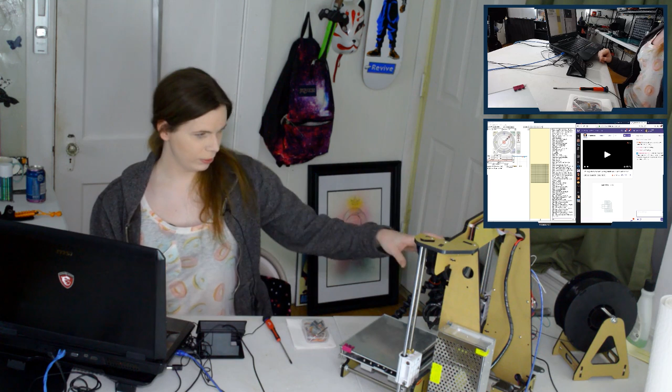Okay, so today we're going to be doing... oh my god, actually let me re-sign in with my other account. I don't want to be... I need to be able to actually mod this channel.

Does everything look okay? Sound okay? All that stupid crap? I'm all sweaty now. I was completely comfortable and now I'm sweating. It's great, I love feeling good.

Oh, like all my cool friends are here. Yay. One second though, I've got to... don't know what's left of the screen over here? You don't need to know what's over here. It's all over here.

Congratulations, Zachary, write this down in your calendar, you're never going to forget this. No, on the screen. On the screen? You mean on this thing? I don't know what you mean.

Windows. What's left? I don't know, it's not a big deal, like you're not really supposed to see that. Yeah, the window next to the Twitch window, I'll make it bigger later, especially after I sign in with a different account, get off this one.

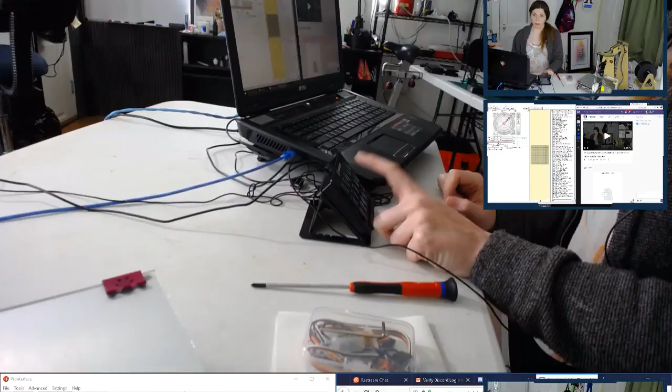So, I'm going to check all the different views out real quick. We got the screen cap view, that's actually sending over the Ethernet, so I'm not using a capture card for that, which is nice. We got the big web camera, we got my giant hands, here's the Elgato Stream Deck, and here's my giant hands. Hate it, just cut the cord. I'm not actually going to cut it because I'm poor.

Anyways, so let's go back to the DSLR for a second. There we go. All right, so we're going to be installing this thing, the BLTouch sensor, onto the 3D printer, so I don't have to do this anymore and level it, because it's super annoying.

Got some paper here. Oh yeah, this came from China and they printed this out on a packing slip. Guess they just forgot to pull it out of the printer.

Looking good. It also looks like they need to change their color cartridge. It's really scan-liney on there, can't really tell on camera though.

Streamlabs OBS does a nice job of joining chat rooms. Yeah, it does, but it's a lot of overhead and I like to have control over everything. Also it'd be over there on the other computer, so I wouldn't even be able to see it.

Here I'll go through the basics of how it works, then we're going straight into it. So it's this little finger on here, and it generates magnetic flux whenever it goes in and out, like that. So it goes down, and when it gets touched a little bit, it's like it's magnetized now somehow, and then it snaps up, so it can come down, touch what it's going to, and then still stay above the nozzle afterwards.

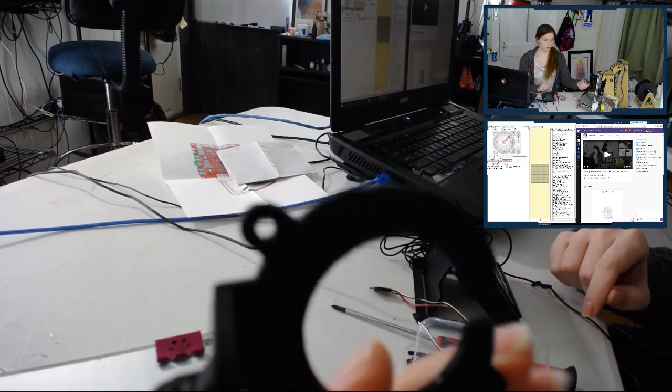All right, so this is the mount that'll let us mount it on the dealie. Where is it? No, that's not the right one. Webcam, there we go. And it's probably not going to focus because of that, you know.

Either way, it goes on here like this, and then that mounts underneath the exhaust fan, or the hot end fan. I forget what the hell it's called.

Is this a butterfly knife? Yeah. Ow. Anyway, so it just goes on there like that.

It's behind the cooling fan, so we're going to go ahead and do the physical part first. Wow, I'm a mess.

Anxiety feels weird now, I don't know how to deal with it. Self-harm is against TOS? I didn't hurt myself, but now I'm really tempted to.

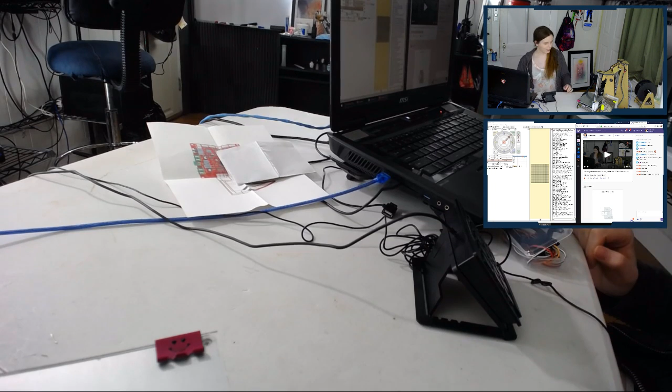Okay, so I might switch over to one of the other views to start installing. Come over here, I'm gonna hug my 3D printer. It's always important to make it feel loved. Oh, you're so cute. Okay.

Alright, ooh, I probably should move the filament over here too, because I snapped the filament off earlier and then I had to manually feed it all back out, and it sucked. I need to get a longer cable for this too.

Oh, by the way, I have an actual Gorilla Pod now. I have to do exercises in order to be able to use it. That doesn't look right.

Okay, oh, it kind of came undone. Must have been all that jerking on it I did.

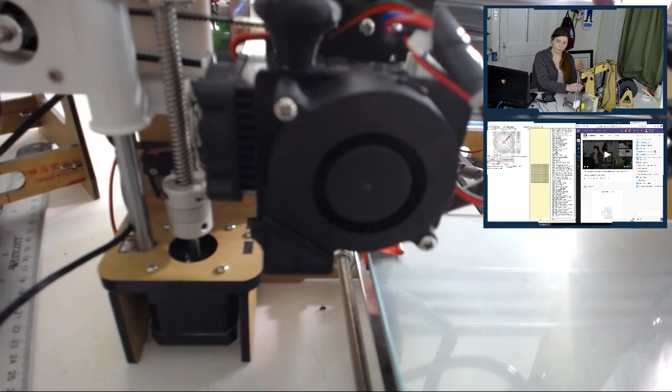New project, image stabilization. Heck you. I'd have to get a gimbal for this thing.

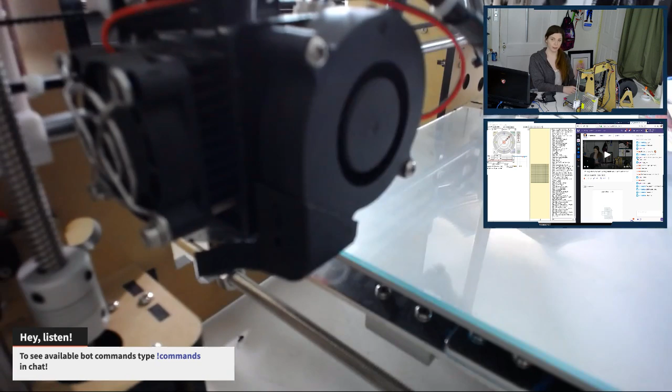Okay, I think that's longer than its focal length. I can move the printer away. Sort of. Come on, center.

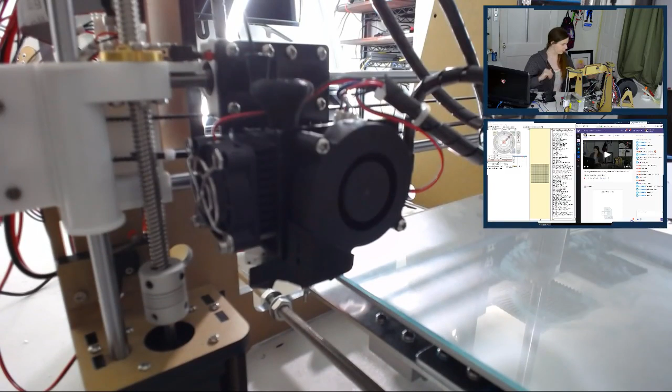Alright, that's good enough. Make sure to always use Milwaukee brand jeweler's drivers, because you don't need your money.

They do. Alright, so this little plate that I've already lost again. It doesn't work. Poop. I think I have to actually open something in the browser to make the bot work.

Anyway, so it goes on there like that, but it has to go back here. So...

Oh, I really wish I could listen to music, but Twitch has made it abundantly clear, and Mixer and YouTube, that you're not allowed to do that. So we're just gonna sit here in silence, unless one of you wants to call me on Discord and sing to me.

Yeah, that's just how it is. Crappy focusing algorithms, we need to get some machine learning. That would actually be pretty useful for focus, because then you could discard based on the training data. That'd be kind of cool.

I have a book on TensorFlow that I've been meaning to go through. Maybe soon.

Alright, so because these screws are too short, we're going to go with these longer M3 screws. It's not going to focus on them, doesn't matter. It's an M3 screw that's a little bit longer. Don't really need a whole dossier of information on it.

Alright, so I think I'm gonna mount this thing on here first. Check out my cool shirt.

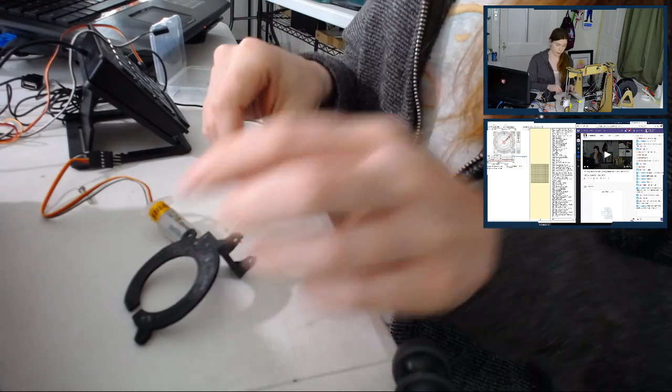I'm glad you're all upset. Please tell me what you think of me, and my face, and my eyes, apparently.

Alright, so I actually had to file this down to make it fit properly. I'll probably put the links when I upload the YouTube video for everything. But I had to file this down a little bit because it was actually touching the bed even when it was retracting. So that was fucking annoying.

There's my first swear. Man.

So sweaty. Why am I so sweaty? I was nice and cool before, and then I pressed stream, and now I'm just like... What's the temperature look like in here? 74 degrees.

It's my favorite scientist. I will stop streaming sometime soon. Please don't, I'm pretty sure I set it to mature audiences only. Wish that meant you could go shirtless. That would be nice, or at least wear a bikini top or something, because it gets hot up here during the summer, and pretty much always.

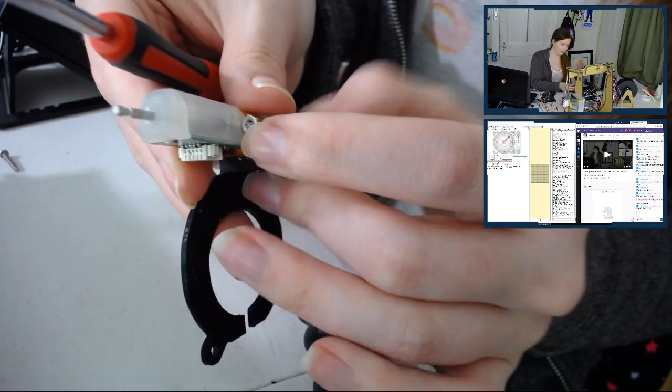It's a lighthouse with a little rabbit in the front. Oh man, I forgot how much of a pain in the butt this was. I'm probably not showing you doing this at all correctly, but these screws butt right up against the edge of the unit, so they're really hard to actually tighten down. If this is actually on the printer at this point, it's super, super awful. So I figured I would just do this now.

You're gonna play Subnautica instead of watching me? No, that's fine, Subnautica's an awesome game.

You would need to blur the robotic dick, but you could explain what you were doing in detail. Let's not rule anything out here. That's true.

Alright, so now we can go back over here. Well, we've already taken the cooling fan off and the fancy printed, I forget what manifold it's called. Kind of looks like an exhaust manifold, doesn't it?

A fanfic writer fan. I guess I didn't follow that. Those things have such a crazy huge following though. I'm always amazed at the people who get into them, and it's always slightly perverted, but it's okay for some reason, which is fine. Everything's slightly perverted. Everything's a lot perverted, you know.

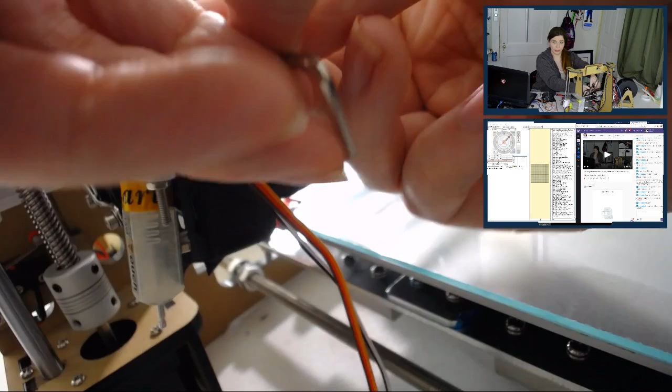Oh my god. I dare you to hold your hair upside down. Sorry, I'm kind of blocking the view. It's been a while since I had to consider camera placement.

I'm just screwing the fan back in anyways, it doesn't matter. None of this matters. But I am going the wrong way. Quick tip for you, anyone who might be new to whatever: you have to go clockwise in order to screw it in. If you go the other way, that unscrews it.

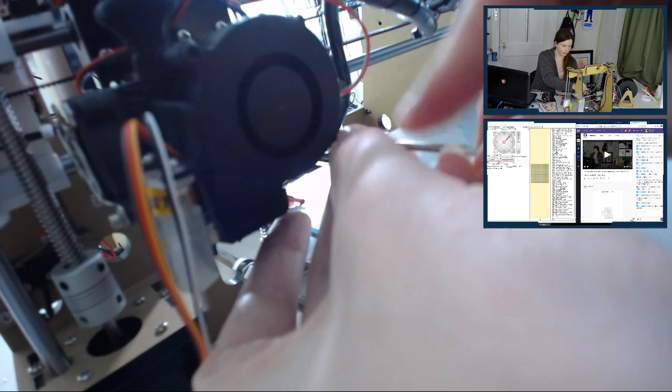Just screwing in screws. Good times.

Yeah, they counterwind the screws or add weird screw heads on, which is still done today. Wasn't it the GameCube game discs that were supposed to be read in reverse compared to standard CD readers at the time, and that's how they kept people from bootlegging? You just reverse the polarity on the drive, on the ESC or whatever on the drive.

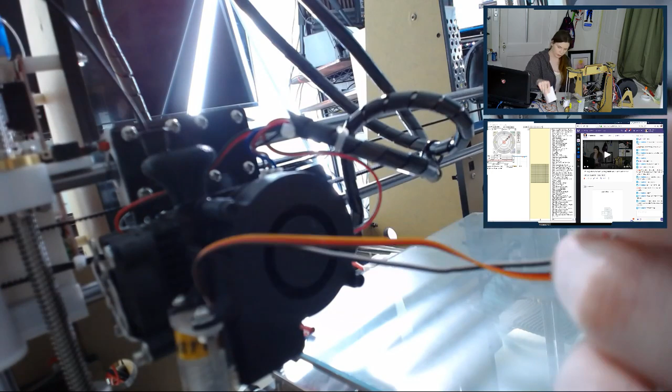Okay, so now we've got this big old connector here, and we've got this piece of paper.

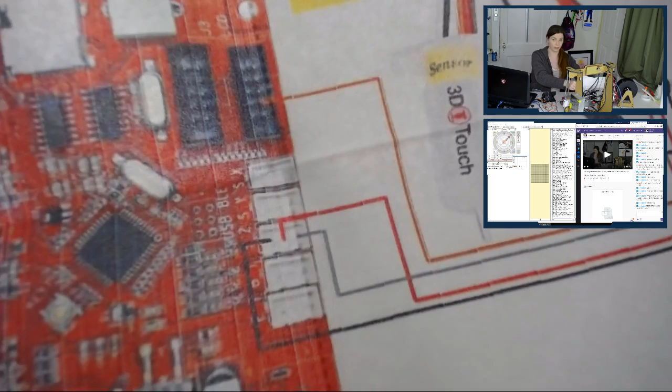Anyways, that's what we're supposed to do. It's actually pretty easy. The most annoying part is that you piggyback off of the LCD up here. You have to piggyback off one of its pins. You can see the connector down there, but obviously there's no easy way to get to it. Last time I was poking around in here, I figured out a real easy way to do this.

Let me see if I can get it in there close enough so you can see what I'm doing. I'm gonna stand up. Alright, so first we have to get the... I'm just gonna sit on my knees. Don't judge me.

I hated Riker. I liked how Riker sat in chairs. That's about it.

Oh yeah, it's like they couldn't buy a new printer cartridge. It's got a bunch of lines and stuff in it. Anyways, so this is all the cabling. Point it at me for a second. This is all the cabling. Oh, I guess there are two separate cables.

Riker had an impressive beard game. Yeah, it was alright.

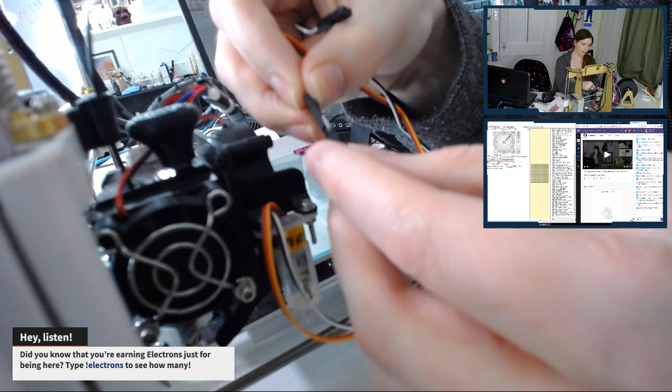Alright, so this end's easy because it just matches the colors together. Let's see if I can move it over a little. Alright, so you just clip these together, I think. Yeah. My giant hands get in the way of everything, but you get the idea.

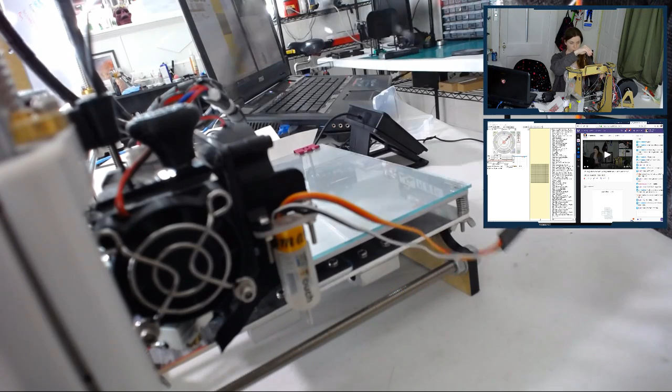Alright, so now we have this jangled up mess over here. We gotta figure out where these go, but first we have to kind of loop them over. Okay, so I gotta feed them over. Let me check the chat.

Riker always looked like he had a joke and he wasn't going to share with anyone, and he felt so smug about that joke. Yeah, that's pretty much it.

Yeah, seems like a beard would be really annoying in the summer, but I don't know. You could always just thin it out or trim it down, I guess.

We'll never know what C. Miami's beard looks like. He hides his face. All he ever shows is his thighs.

Let me catch up on the chat.

His joke was a plug. That was the source of his smirk. Oh yeah, I did get a face shot. I forgot about that. His joke was a butt plug? Is that the joke? Or did I miss something?

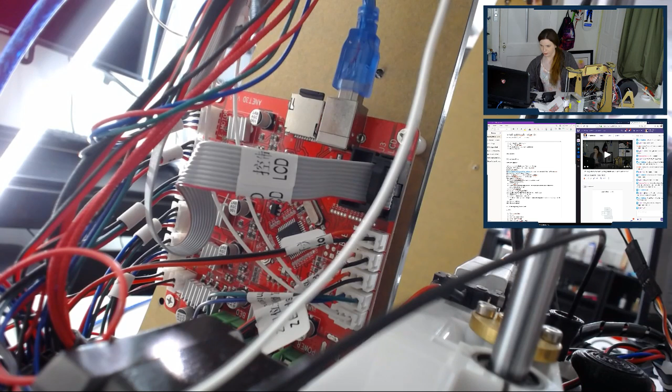Yeah, I don't know what, my old version of it never got toasty, but this one sure does. Must be that Carl Zeiss image lens process. Carl Zeiss.

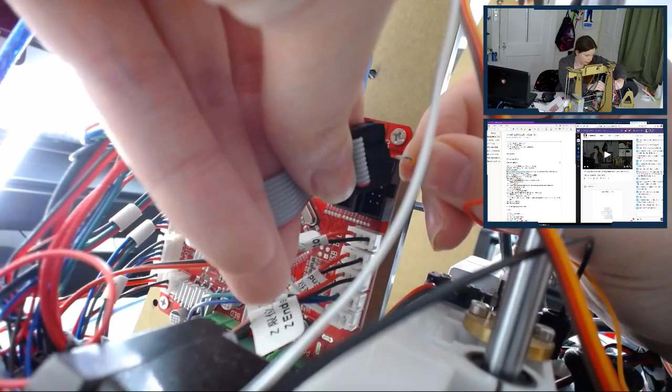Alright, so we basically have to do pin 27. Instead of soldering out a little pin here like a lot of jank masters tend to do — that's a weird word I've never said before — what I'm just going to do, what I did last time, which you guys would probably remember, not, is I'm just going to stick it in this hole, and come on, stick it right in there, twist it to the side, and you're done. It's nice, pressure fit, no problems. And it works.

Alright, now I'm going to check my phone for how I hooked it up last time. Where did I put my phone? Oh, I'll put it over here. One second, I gotta get water.

I don't think you can drink alcohol. I should probably check my Restream chat to see if anyone else is chatting with me. If you're on Mixer or something, my chat client broke so I can't talk to you, which makes me sad. I'll fix it next time.

No alcohol. Beer's just supposed to be considered a food group, but this is America.

Okay, so the white cable goes, well, let's unplug this first. I'm gonna have to get a little fancy here. Alright, so we need to find the Z-end stop, which is nicely marked right here. And we just pop you out. Come out. There we go. Alright, so we got the Z-end stop, and it actually has 3 pins, I think, because it can be a PWM device too, which is lucky for us. And you look over here, and dang nabbit, okay, so that pin goes in there.

And our white pin, what is our white, or cream colored pin or whatever? You can't see because the printout quality is terrible. I could probably guess if I read these. We got ground, we've got... you can't read this, never mind.

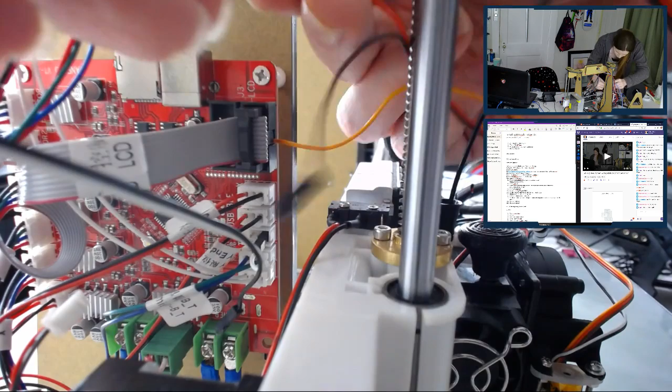Okay, so you got white in there. And we gotta do red, which is gonna probably be our 5 volt, yeah, at least they standardized that part. There probably is a PDF, but I'm not gonna worry too much about it. I know where everything goes. I'll post one with the YouTube video when I chop it up and take all the embarrassing stuff out.

Okay, so we got that. Now there's orange.

Okay, so one of these is supposed to be a ground. They're both ground, and it says to link them together, but I'm going to do this the lazy way, and I'll use a ground on the secondary LCD controller. I don't know if you can see what I'm doing at all. Anyway, so yeah, you can see that.

Alright, so these check out. These are good. We got our power, our control, and our ground. And then we need another ground for, I think, another... I'm not actually sure what the power system for... I think there are two separate power systems for the... well, no, never mind. One's just a weird control signal, I guess. It's probably a PWM or something. What do we got here?

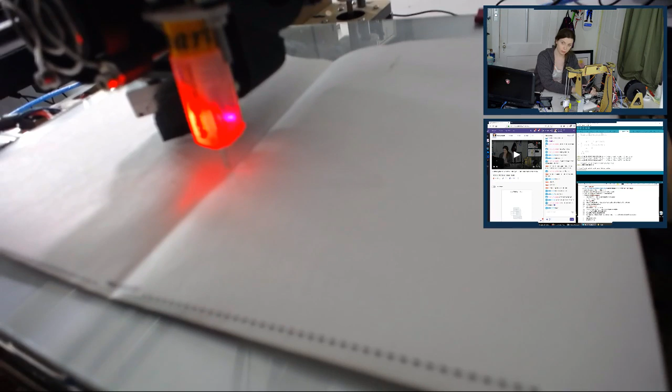Alright, so what we're going to do is lower this puppy down until it's touching just the tips. Alright, now it's compressing the bed a little. We know exactly where these guys touch, and we can mark it out.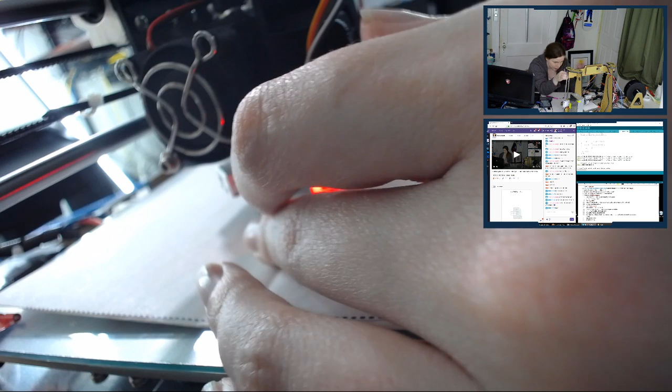I've got a pink pen because I'm a girl. Okay, how am I going to mark that? The pen isn't going to fit under there. I need help, I need help. I think if I look, it might... maybe I can pull the pencil apart. Damn it. Okay, you know what I'm going to do? I'm going to lift it up, mark, and then put it back down. And if it's wrong, I'll do it all over again. Just going to keep my eye on that spot. Actually, it made a little indentation. So I think we're all set.

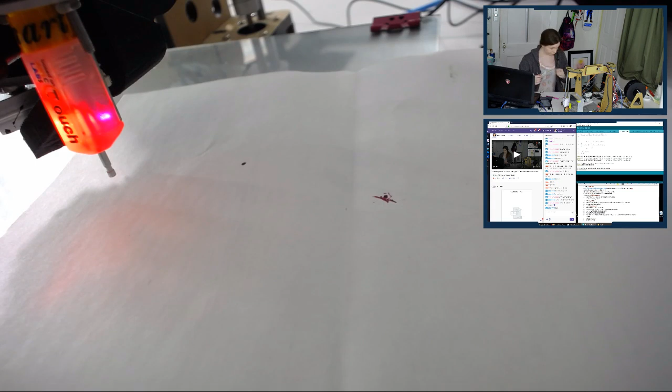Alright. So now we've got the nozzle here, and the probe here.

What am I supposed to do with this? Anyway, let me get a square. Let me get a square. It's Swanson Speed Square. This stream is sponsored by Swanson Speed Square.

So, not a cat. How big is your base so far? And do you have any vehicles yet? I feel like I'm making this really difficult for myself for no reason, in Subnautica. Oh, you have the loader? Awesome, I never got that far. I kept dying trying to get vehicles.

Kryzen, that's why you spend $800 and get a... this isn't gonna work.

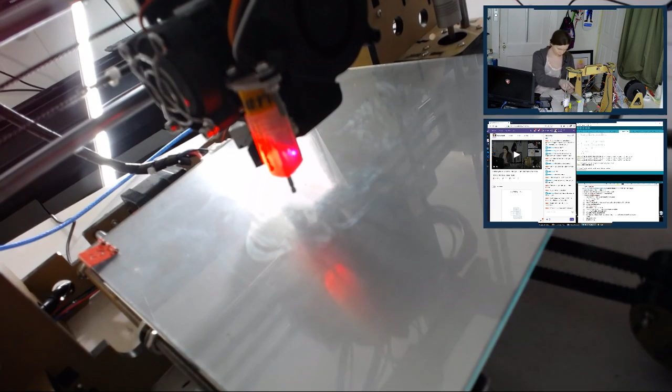Great, the kids are singing downstairs. And that's good.

Okay, so what I like to do for this, because it's a pain in the butt, is we lower it down. I'm gonna try and kind of get this on camera so you can see what the hell I'm doing. Why the hell would I stream it if I don't want you to see what I'm doing?

Come on, over here. Meow. That's probably not gonna work. Stupid ass gorilla pod. More like invertebrate pod.

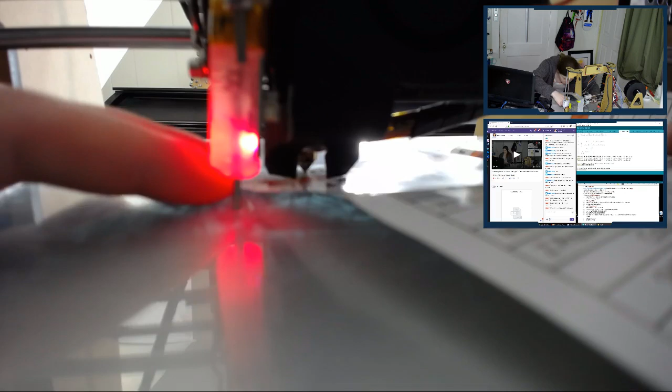Alright, so what we're going to do is lower the nozzle until it's touching. I really think it's extended. Let's see if we can fit a piece of paper under there, or anything really. They're both basically the exact same height, but I think it means extended.

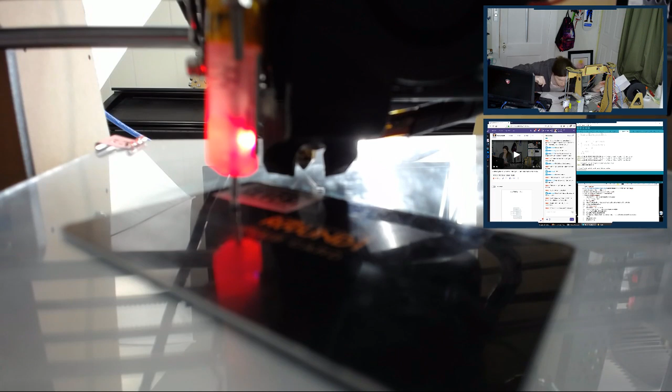I hate this part so much. Okay, so it's touching. And this Round 1 club card, which is a great arcade if you've ever been to it, you can see how many times I've been on the back. It just fits underneath it, and I think this is about 1 mil.

Holes, holes, holes. What? Wrong side. No, it's only one, huh? Okay. Put holes in it? What do you mean, like put a hole in the thing I'm measuring so it can touch and the other thing can't? Because I just do that with basic geometry instead.

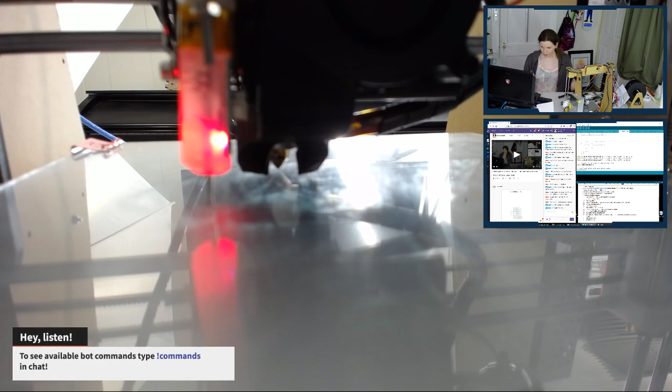Oh, my pink pen exploded. It was my fault, but now I can't find the spring. I need the spring, I need the spring. This is an emergency, so I'm switching back to DSLR view. Help. Where's the spring? Help. I lost it. Fed up with this world. Oh no, donate money for new pen spring and pink 3D printer. Please, I'm a girl.

Alright, if it's one above, right? And above is plus. So 1 millimeter above, and that's going to be Z.

So now we can go back to our screen cap, which is actually working pretty well, by the way. I'm using the NDI interface for that, which is great, super easy to set up compared to an RTMP2. Still sad about my pen.

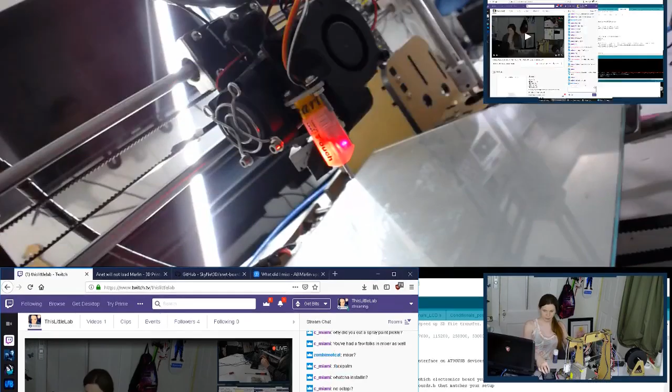I was gonna say it before, it's edible. You still really shouldn't spray it like in your mouth because there's methylated spirits in it or whatever. But once they flash off, you're fine. Not flash off, but once they evap.

With my stomach the way it is, there's no flipping way I would do something like that. Even that kind of irritated my stomach a little bit.

I've had this sitting around for a while. I don't think it has an expiration date on it though. No.

So now all the mystery's gone. Yeah, I didn't figure it could. It's basically stuck in a pressurized chamber, I don't know how stuff could even get to it. Sorry, zombie, not cat. I didn't want to give away the mystery, but then I felt bad, so I did.

It could get in during processing. I don't know how it would survive though. Those cell walls be like...

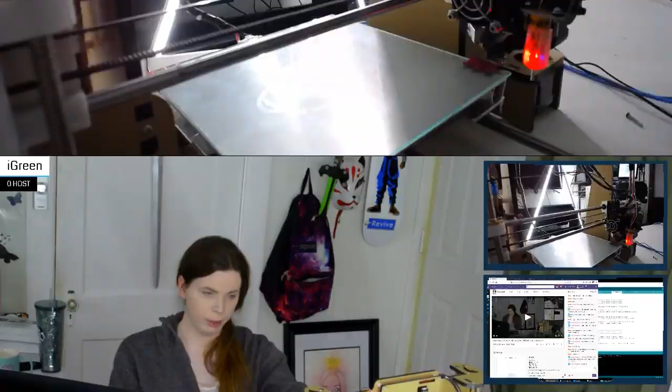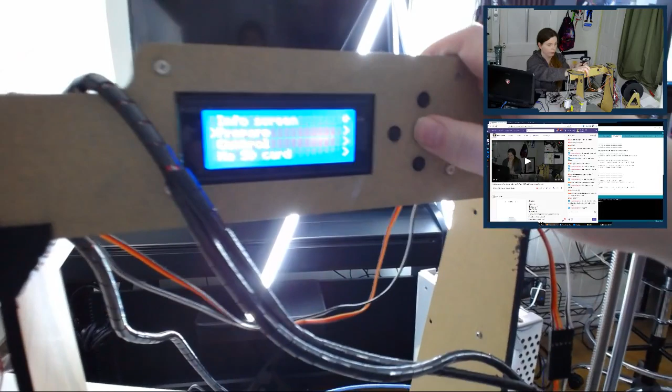Alright, so it says 3D printer ready. I'm gonna pop into webcam mode here, and we're gonna try and home this puppy in. I'm gonna use the... Okay, so prepare, we're gonna do... Let's try level bed, I may have to still unplug this, this might still get noisy if it doesn't quite work like it's supposed to.

It's making kind of a weird noise. I don't really understand what it's doing.

Your phone is on the verge of death. You need a higher amperage charger and a fast charge cable, but your phone's pretty old, right? Hey Acri, look up if a Nexus 4 is worse than your phone, because if it's not, I have a Nexus 4 with all the stuff to repair it. I could repair it on stream and then just give it to you. It's an older phone, but it worked great when I had it.

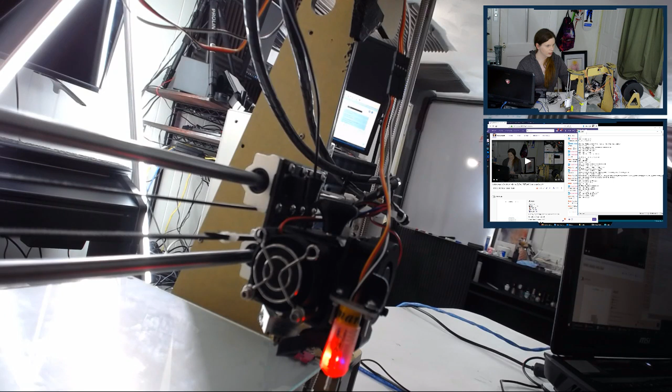So it's not... they're not bound up in any way. Oh my god, really? It's just homing insanely slow? Like, you can't even really tell it's moving, it's going so slow. X380. I'm so confused as to why it's moving so slowly.

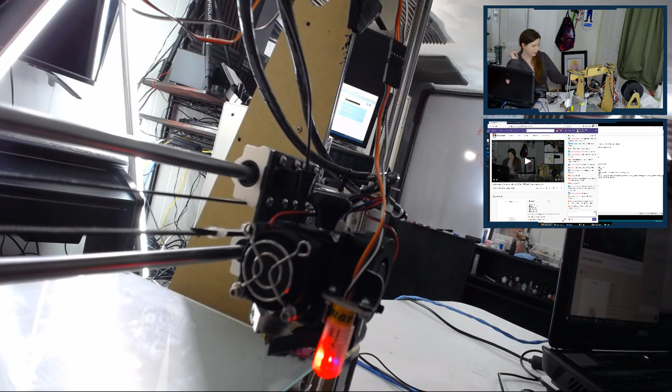Alright, good night, Acri. I'm probably gonna go soon since this is being very bizarre. I don't even know what to think of it. Like, why are all the motors moving so slowly? What did it say after the G28 command? I don't think it said anything.

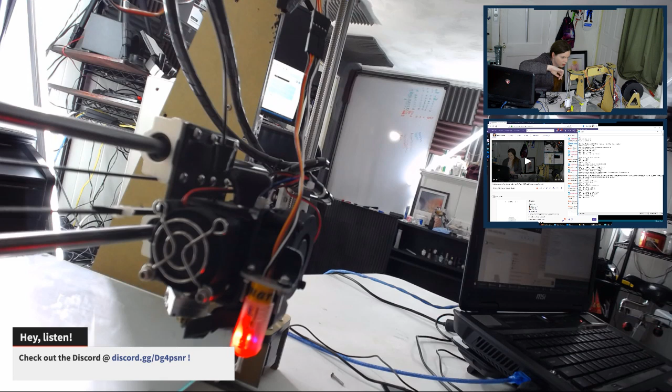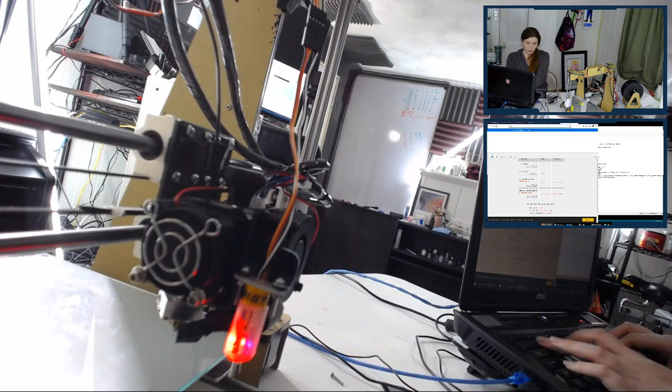It's hard to even tell it's moving, it's going so slowly. No, but still this motor. Man, that's so weird. It's moving so slow. I think this might have to be the mystery for tonight. I'm gonna just have to look up why. I might look it up real quick and see if I can figure it out. G28 is super slow. Well, I wonder if I put in the G28 argument wrong and it's going as slow as possible.

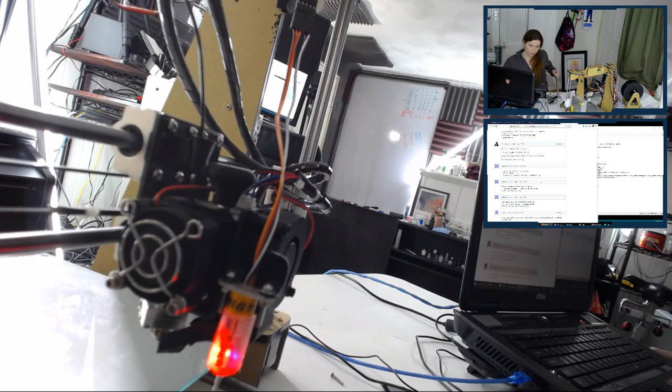So part of config advanced. So weird. It seems like all the new stuff has so many bugs. Frustrating. So it says that's been fixed. I don't know why. Yeah, it's like slowly traversing to the end stop. It's taking forever.

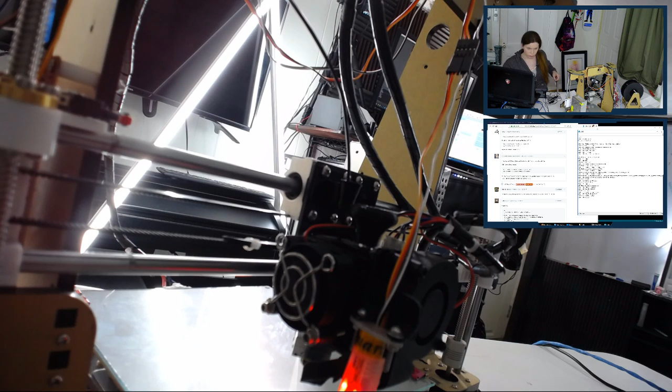It moves like crazy now, and the print moves and stuff on the table is falling over. The print is ruined, just need to kill it. Tries to move too fast, maybe? Max acceleration per units, what's our M201? Yeah, it's super high actually. I wonder if it'll ever actually home.

Whew. Anyway, this has been a good first test of all the streaming stuff. This didn't work out quite like I thought it would, but I'll figure it out and pop on tomorrow, and maybe do a print and play or something.

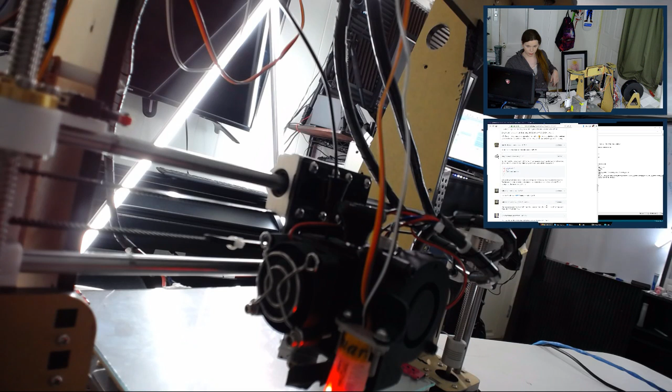Oh my god, it is so slow. I can't believe how slow it is. I'm gonna go get some bagels and some food. What is it, it's like 75 in here.

Alright, that's gonna be it for me. Because this is taking forever, I'm just gonna have to sit here for a couple hours and figure out what's the deal.